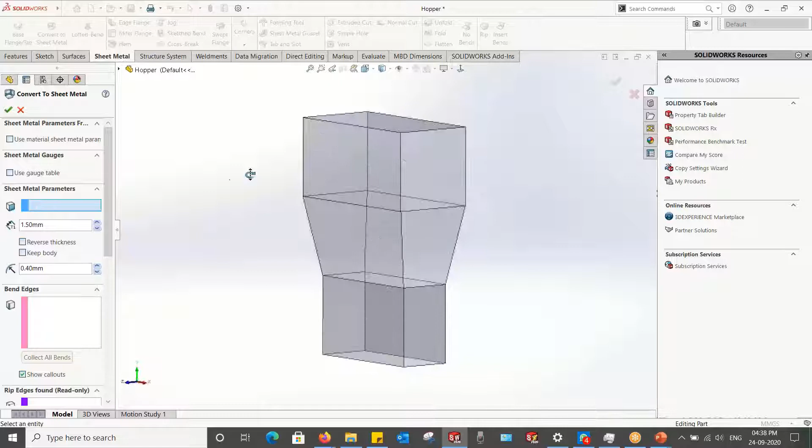So let's start with the fixed face. Okay, I have selected a fixed face. I think there is no need to change this thickness. The thickness is sufficient for a sheet metal component, and the IR is also sufficient, or we can change it to 1 as per our requirement. Now this is the time to collect some bend edges. Just select some bend edges.

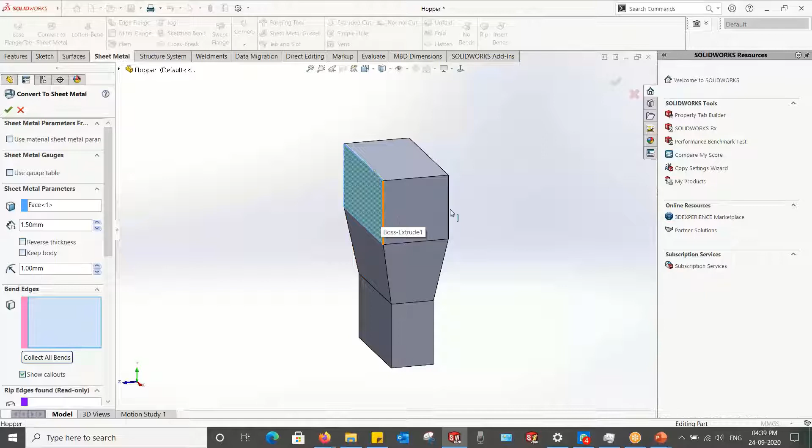One thing I want to show you: if you select bend edges one by one, the corner gap edge will automatically be identified by this command. This is the smart work done by this command.

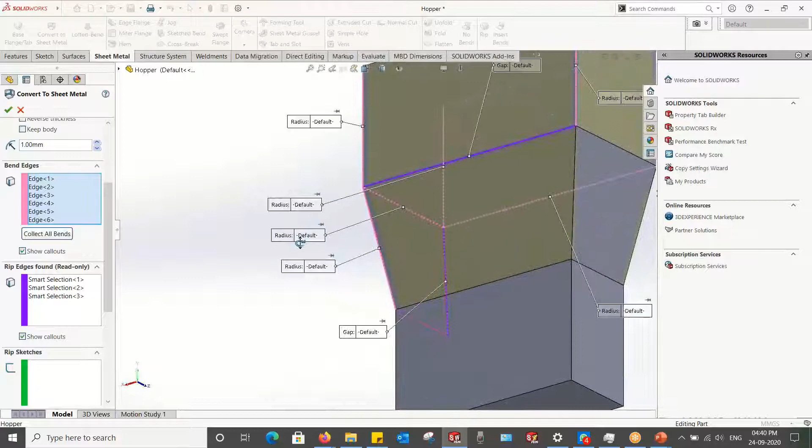Okay, so let me show you one other example. Let us continue. One bend edge, second bend edge, and the corner edge is automatically identified. Similarly here, if you select this edge as a bend edge, the corner edge is automatically identified. This is the smart working of this command.

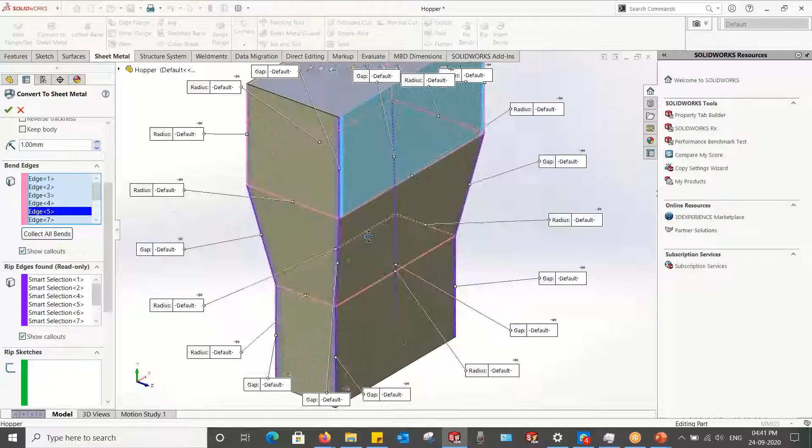Let me select it as simple as possible. Now, okay, one more thing I want to inform you regarding this command. Listen carefully. For any face, first you can see that at least one of the edges of this face has been selected as a bend edge. In case of these faces, there are more than one edges, but at least one edge is selected as a bend edge. If we leave any face without selecting any of its edges as a bend edge, the face will automatically be removed as an open side.

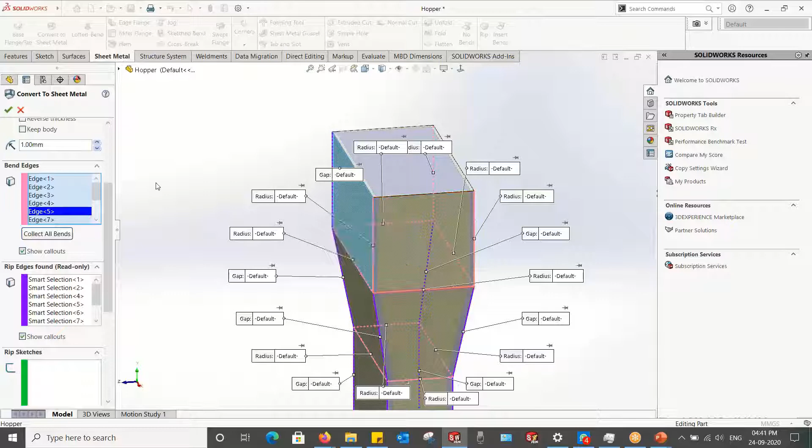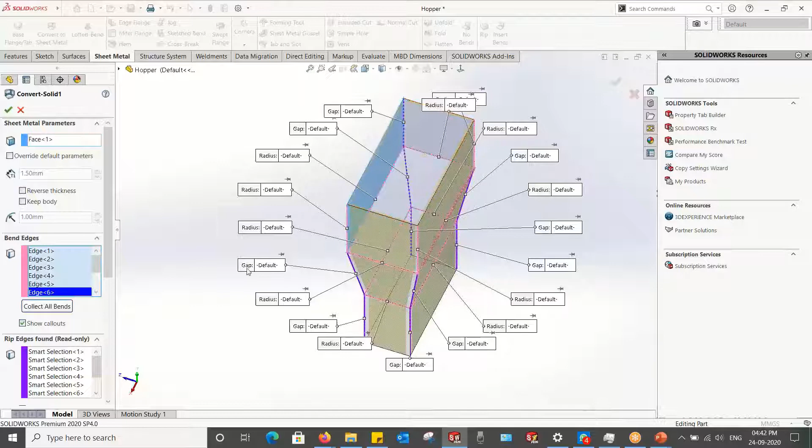Just click on OK. Now, I think all of you have seen that I have left the top and bottom faces without selecting any of their edges as a bend edge. That's why the top and bottom faces are treated as openings. Quickly return to the command and select any one of the edges of the top face as a bend edge. Now see the behavior.

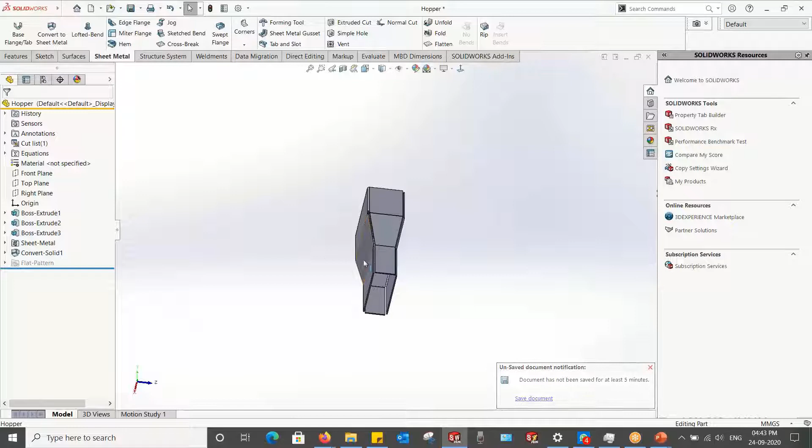Okay, this is the thing I want to show you. This is the major point. Sometimes conversion is tricky for us when we are not clear about this point, and we avoid using this command and only use it for imported bodies. Even for native CAD data, using this command is sometimes much simpler than creating a body in sheet metal. In this property manager, you can also control corner relief and corner gaps.

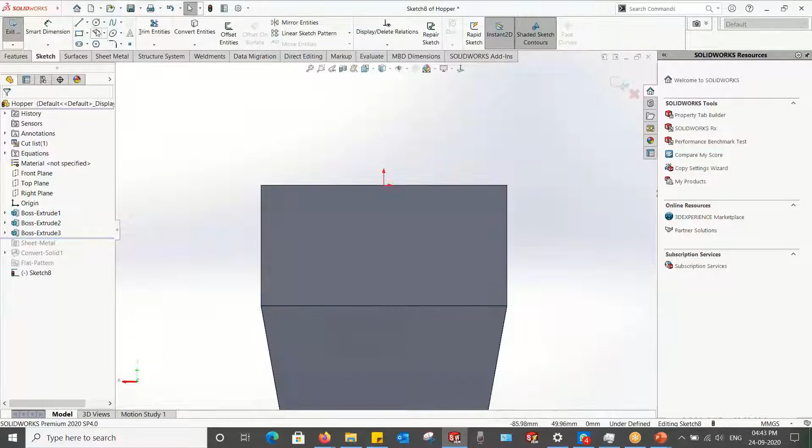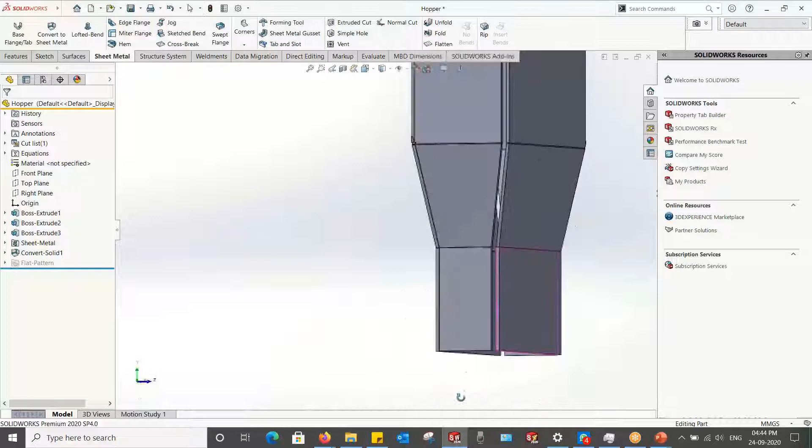Now, let me show you the rip sketch, what the rip sketch command will do for us. Say I want to create a straight gap or a straight notch on this face, 20 mm. We can select this sketch as a rip. And now you will see that the rip sketch also creates a gap, and the gap value is similar to the rest of the rips. This is the work of rip sketch. Similar work will be done by the rip command. In 2020, if you are using 2020, you can also see the preview of the command.

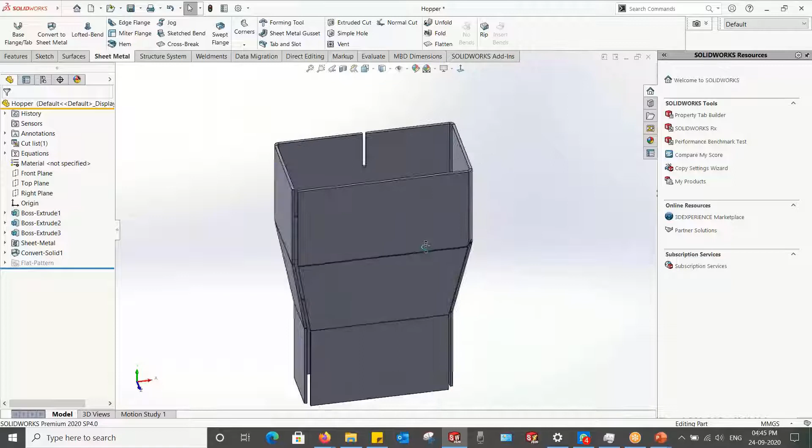Okay, so now this is the time to see the flat pattern of this hopper-like body. This is the flat pattern. Quickly export this to DXF or DWG for your cutting machine, turret machine, or laser cutting machine, whichever you use. So now this is the time to use some different commands like insert bend and rip. By using these commands, again I will convert the same solid to sheet metal. Okay, delete this.

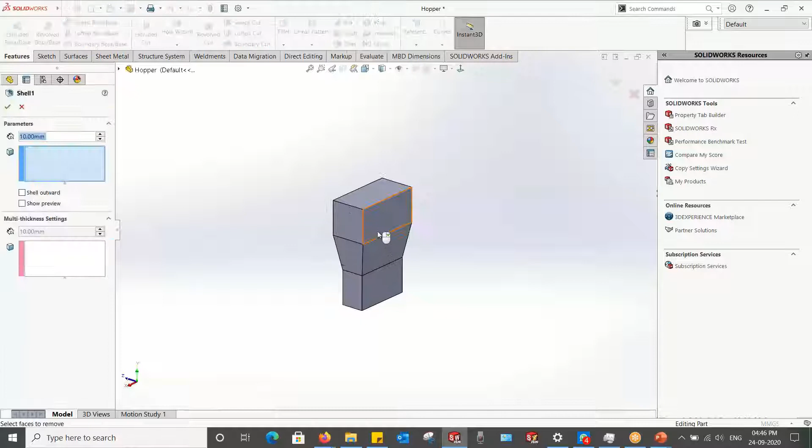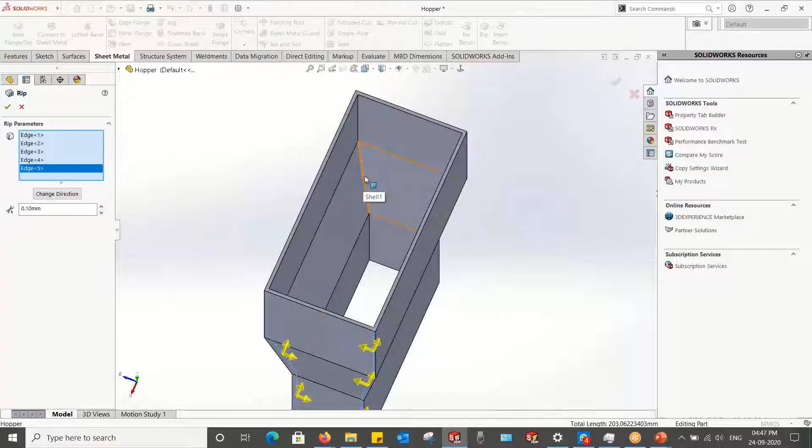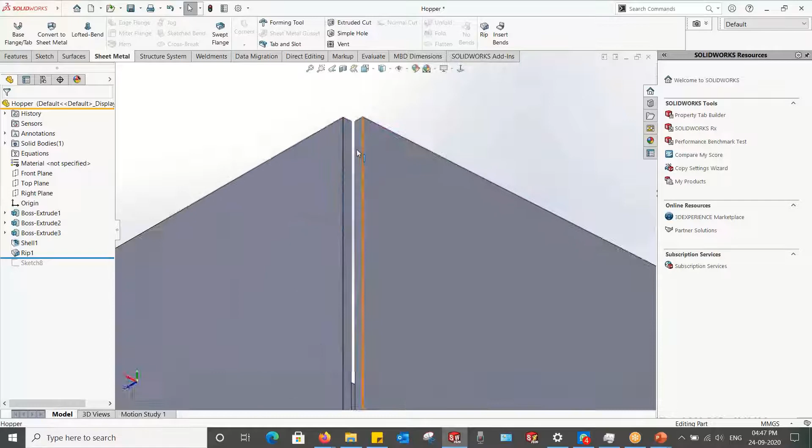Now first make this hollow, with a thickness of 1 or 1.5, whatever sheet thickness you want. The next step is to add some rips. I will create some rips as per my design requirement. Let's see if this gapping is possible or not. Yes, this is possible. From here we can control the gap value, corner gap value. So you can see corner gaps have been created.

Okay, now the insert bend command, and again select your fixed face. Inner radius, say 1 mm or 0.5, or any value you can take, and set the auto relief value. Rip parameter, if there is any sketch, decide the value of rip gap and click OK. Auto cut relief was made for one or more bends. Okay.

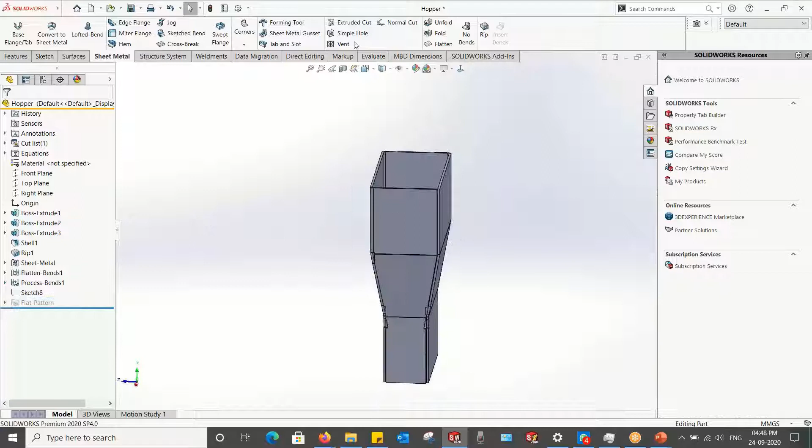Now you can see the sheet metal parameter has been added, and also the flat pattern folder has been added. So just click on flat pattern, and the flat pattern is ready to export for cutting or for drawing. So this is the conversion of native CAD data. Now I will discuss the same commands for imported data as well.

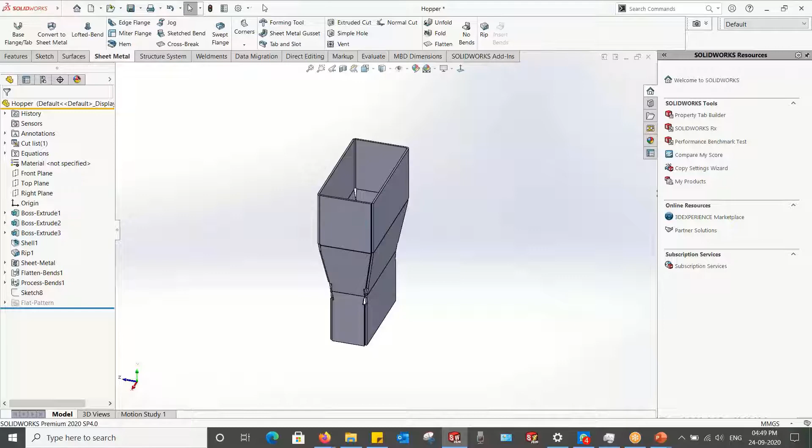Let me open an IGS file I have already created. If there are any faulty faces, as I have already told our users, faulty faces are a tricky item, and this is the time to run Import Diagnostics. We can also directly convert from imported data to sheet metal with the help of FeatureWorks in a few clicks, but I will show you this in the next slide. This time I will try to convert this imported data to sheet metal by using convert to sheet metal.

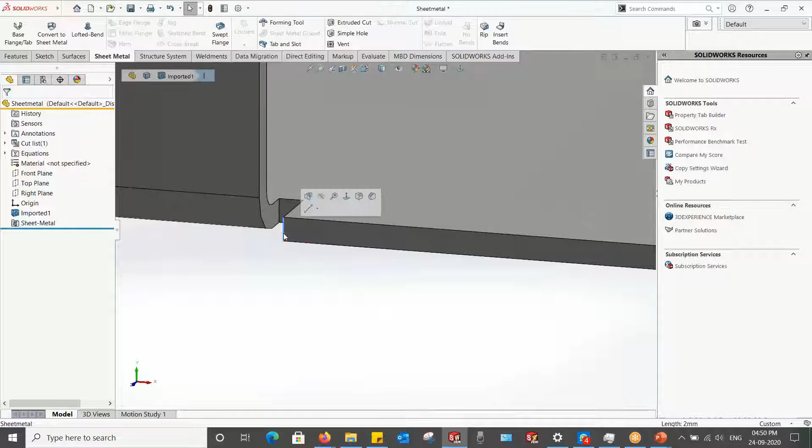Let me proceed. This is the fixed face. The first process is to check the thickness, if you want to maintain the same thickness. This is 2 mm. So just convert to sheet metal, fixed face, 2 mm. Why have I inserted a 2 mm value? Because I want to maintain the same thickness as given in this imported data. And inner radius, just check the inner radius value, 1.5 mm. 2 mm, 1.5.

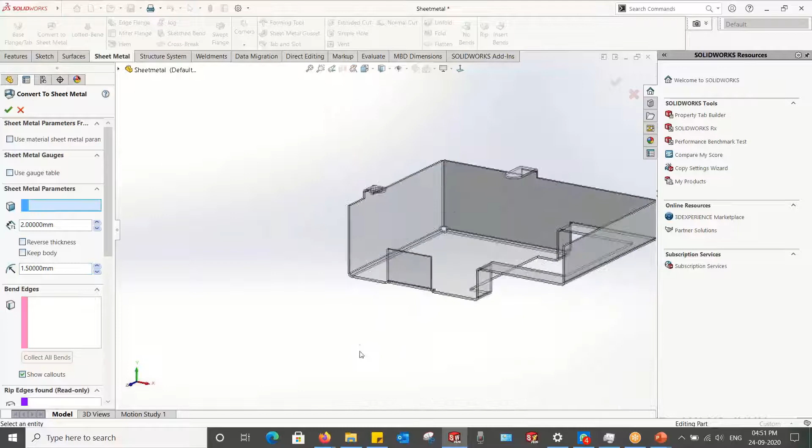Okay, now this is the time to collect all bends. Let's see what will be the result. Just click on OK, and your imported model is converted to sheet metal. Now you can generate a flat and also generate a DXF.

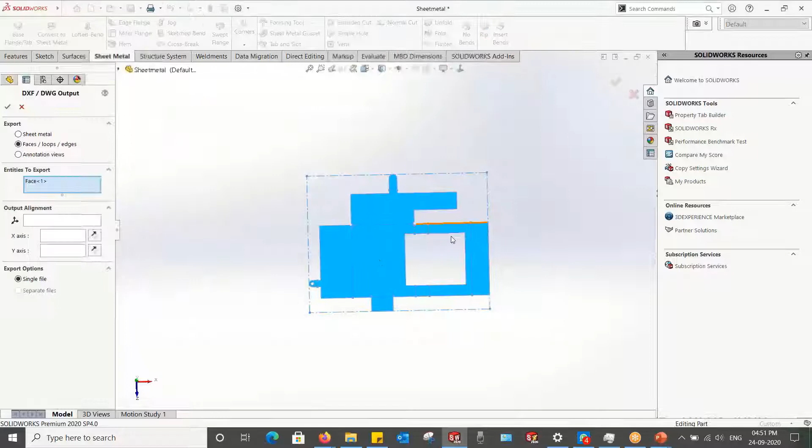So this is the DXF. Now you can use this DXF directly in your cutting machine. Okay, quickly move to our next slide. The next is FeatureWorks for sheet metal.

FeatureWorks is the add-in provided in SolidWorks 3D CAD for all modules like Standard, Professional, Premium. It also enables users to deal with imported data like IGS, STEP, Parasolid, and also native CAD data. It also helps users to convert a single imported feature into different supported SolidWorks features like extrude, revolve, cut extrude, cut revolve, or some sheet metal features.

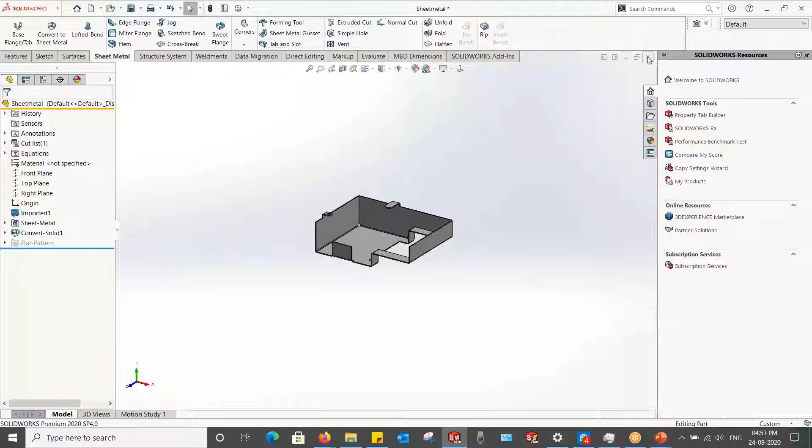Let me show you how. These are some features supported by FeatureWorks, and this is the time to show you how FeatureWorks works for sheet metal components. Quickly open the same IGS, just import and heal, and click yes for FeatureWorks. Let us see how FeatureWorks makes the process easy.

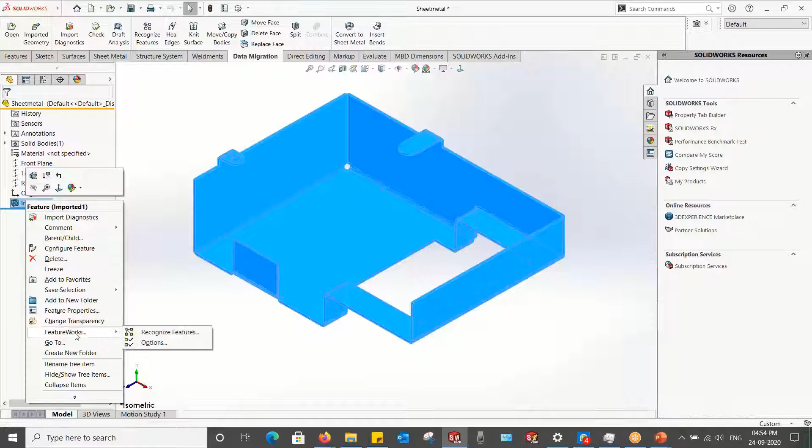First, let me show you where you can find FeatureWorks. This is Recognize Feature. Here you can run FeatureWorks, and you can also run it by right-clicking on the imported body below your origin in the history and choosing FeatureWorks or Recognize Feature. Okay, just select and click on sheet metal features.

No need to recognize extra features, as it will take more time. Just select sheet metal features and some other features if you want to recognize them. Select the base fixed face. Now, by proceeding forward, FeatureWorks starts to recognize your 3D CAD data.

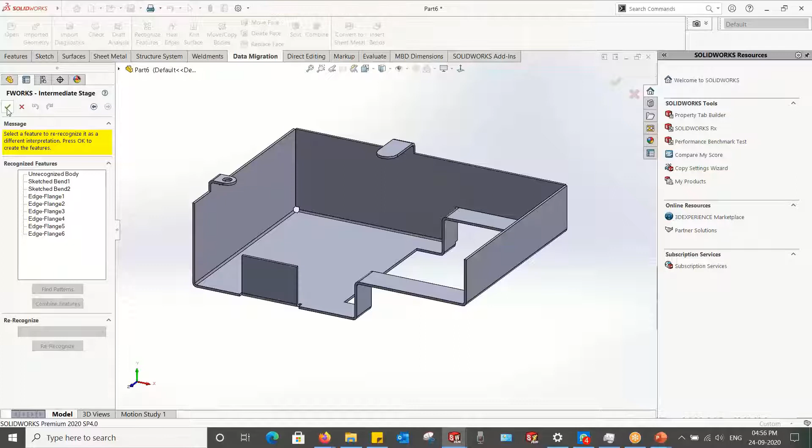One more thing I want to tell you: FeatureWorks works perfectly with bent sheet metal components. Okay, so let's see what SolidWorks has done for you. It is converting what it has recognized. SolidWorks is applying all the recognized information to the imported data and hopefully it will convert to a perfect sheet metal body with the same thickness, same gaps and other values.

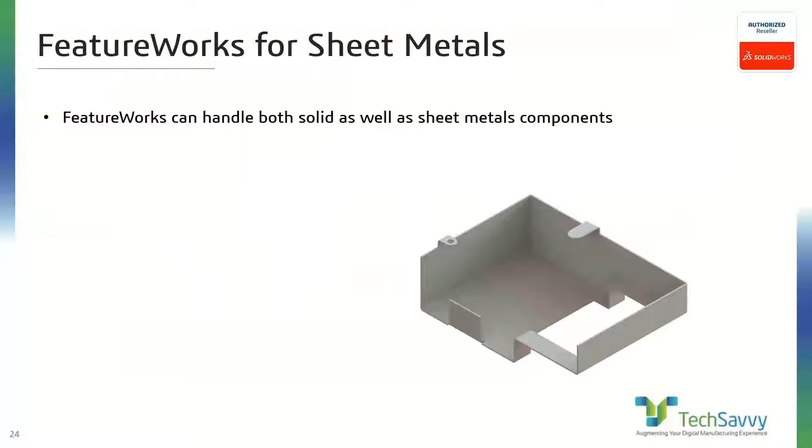The history has also been created. Check it by pressing the flat button. Now the flat is created. Pretty easy. Okay, so this is the method to create sheet metal from a solid by using the convert to sheet metal command and insert bends. We have discussed the utilization of the rip command and the meaning of rips, and how we can handle imported data with the help of FeatureWorks for sheet metal.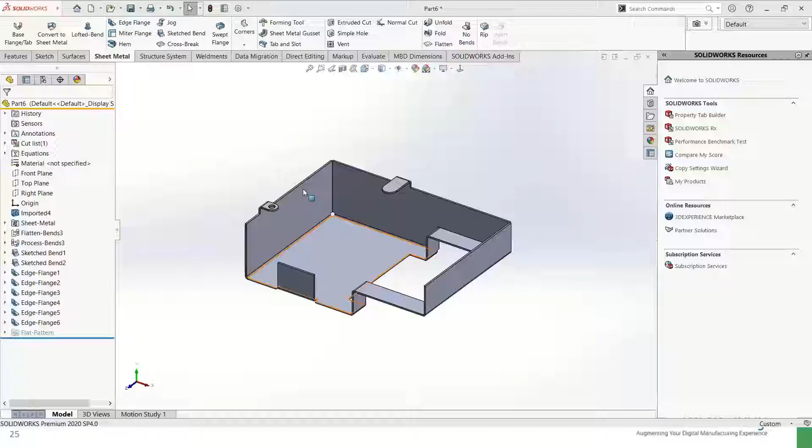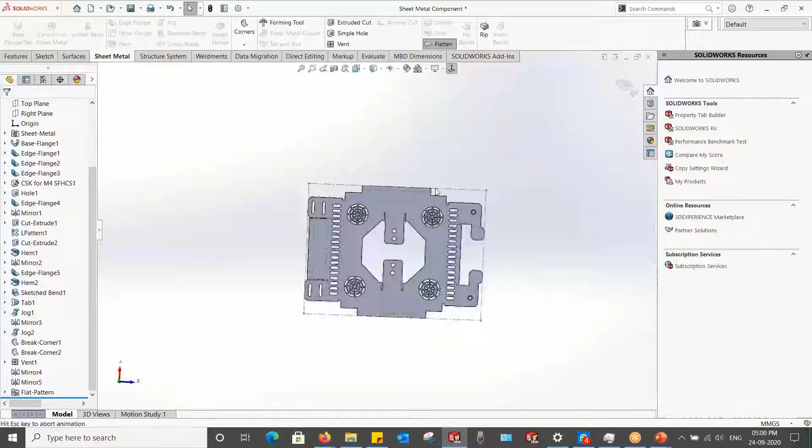Now, commands in 2D to generate tables. This is a very good topic. So let me just open. I think some of you have recognized this component. This is the component you have seen in the last exercise. Almost all the commands related to sheet metal have been used for creating this component. This is a good example for understanding how sheet metal works inside SolidWorks. This has a pretty good flattened shape.

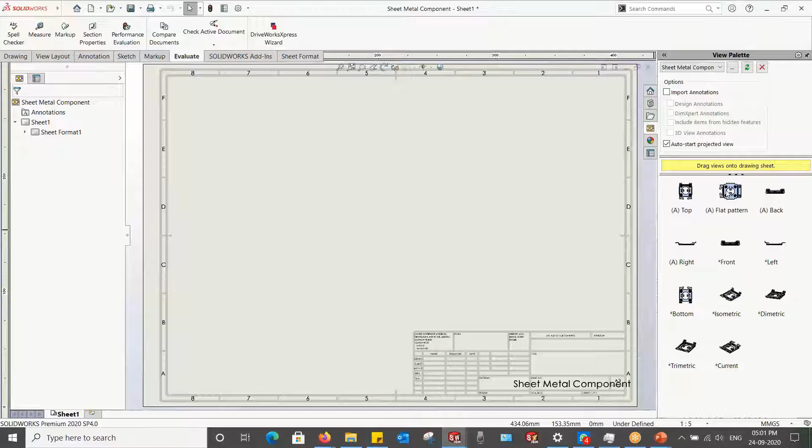Now this is the time to show you how tables work for sheet metal components. I will also discuss some problems. Some of you have complained to me that sometimes you have not found the sheet metal flat pattern inside the drawing View Palette area. Some of you have complained that you created a sheet metal component or body and the flat pattern is not found in the View Palette automatically, so you had to use different workarounds. So I will also discuss that point.

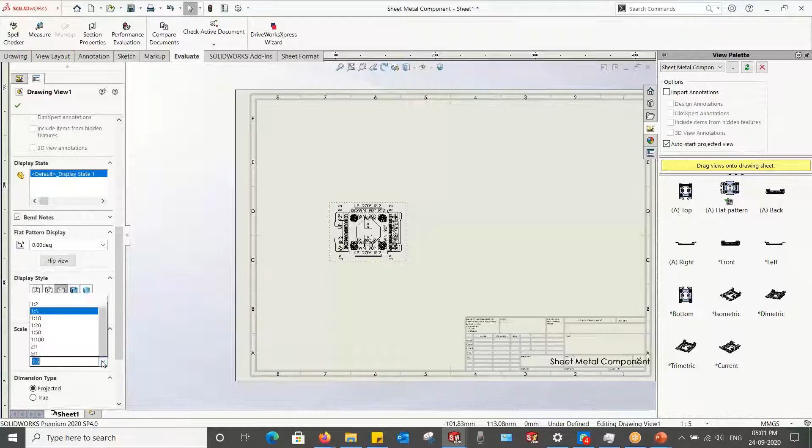Okay, now just drag and drop this flat pattern and scale this to a higher value. What will the sheet metal bend table do for us? Actually, by using the sheet metal bend table, we can create a bend list.

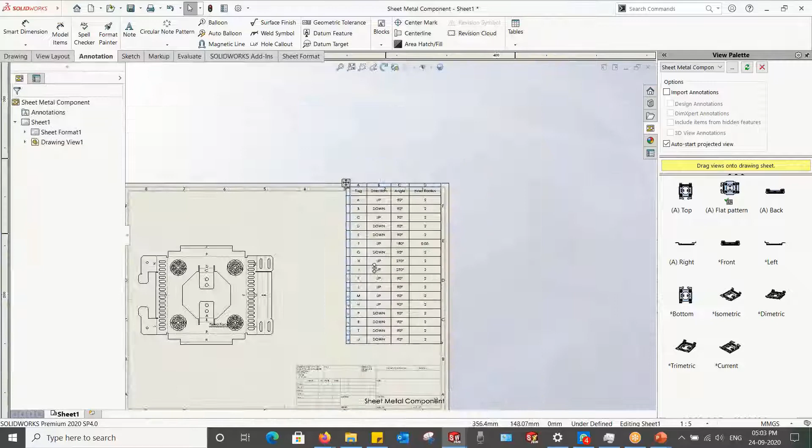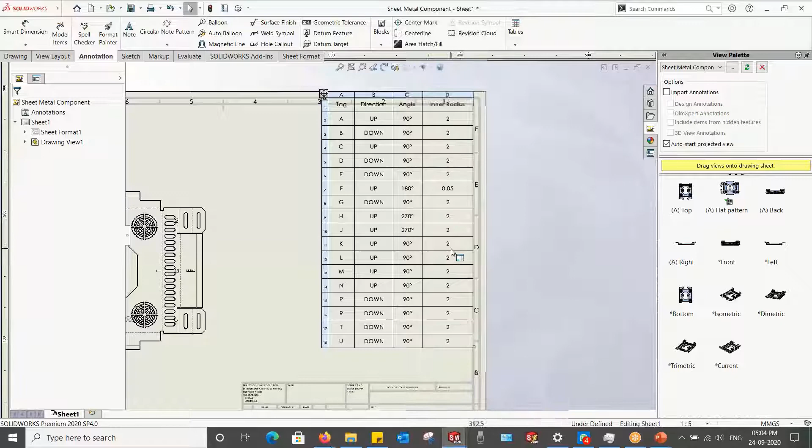Let's add a bend table. And you will see that all bend information will attach to this table from this flat. All bend information you will find here, like tags, and direction, which bend is in the up direction, which bend is in the down direction, how many degrees you have inserted in your model, and the IR. All information you will find here for this model.

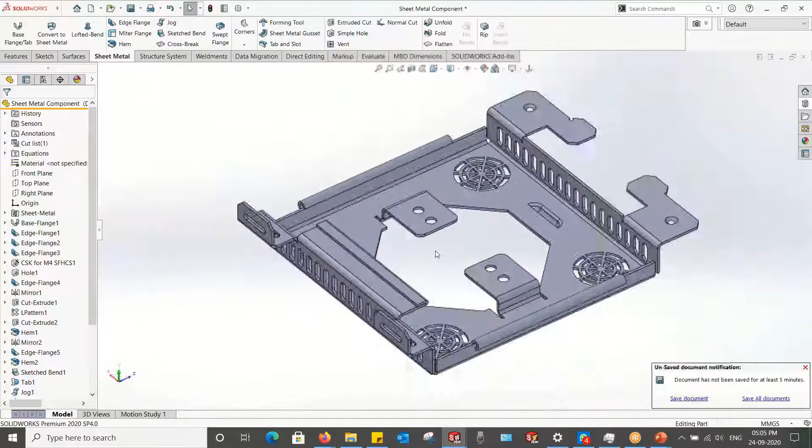Okay, now this is the time to do something extra with this model. Put some louvers on this, position them by using dimensional values, and click OK. What I actually want to show you is how the punch table works for forming tools.

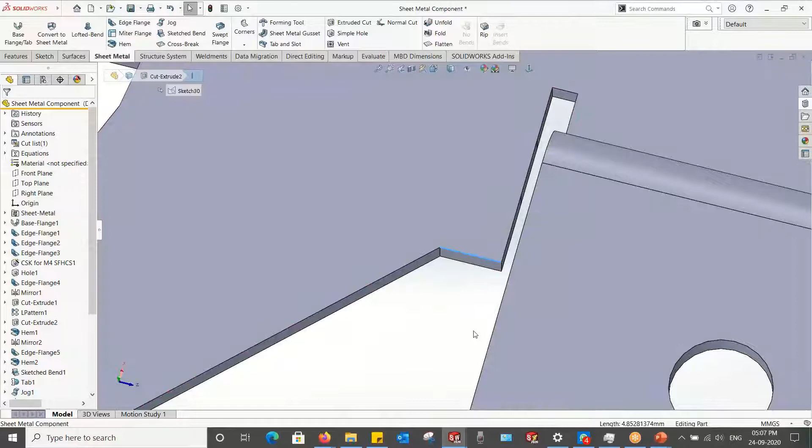You can also create your own forming tool. Let me show you how you can create your own forming tool. Let me take some dimensional idea. Okay, now quickly open a new part.

We are going to add a customized forming tool as per our requirement with the help of the forming tool command, and then we will apply that forming tool on this model also. Then we will create a punch table inside the drawing. Just start to create a forming tool. I am going to create a very easy forming tool, not a typical one.

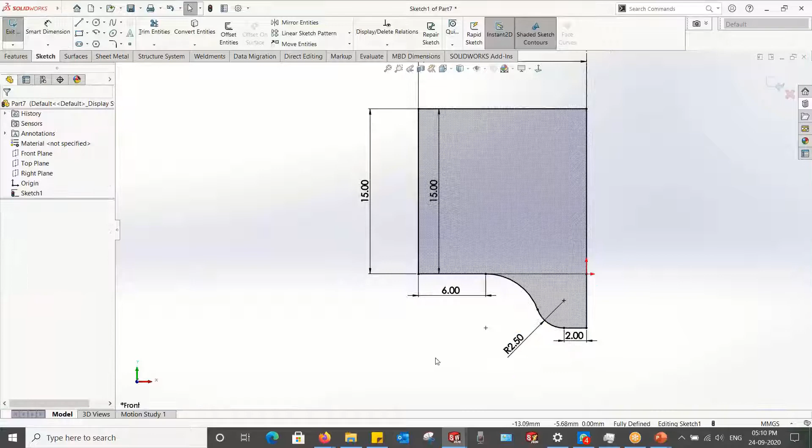First make it horizontal, then provide some dimensional value, then provide some dimension value here as well. Okay, now this is the time to revolve this model. And save this. First you have to save your model, like training forming tool.

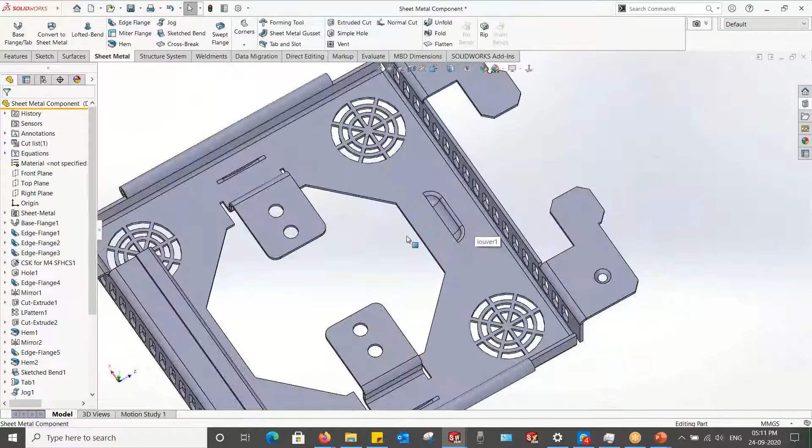Okay, now I'm going to explain what the forming tool command will do for you. The forming tool command will never apply a forming tool on your sheet metal body. Sometimes users are confused that the forming tool command will help them create some forming punches like this on their sheet metal model, but the forming tool command is only to help you create a forming tool.

Just apply some parameters like stopping face, and faces to remove like this. If you create a model without selecting faces to remove, then it will simply create an emboss. If you select a face to remove, then it will create an emboss with hole. Okay, I will show you both items. Let me save as forming tool. Hole, without hole.

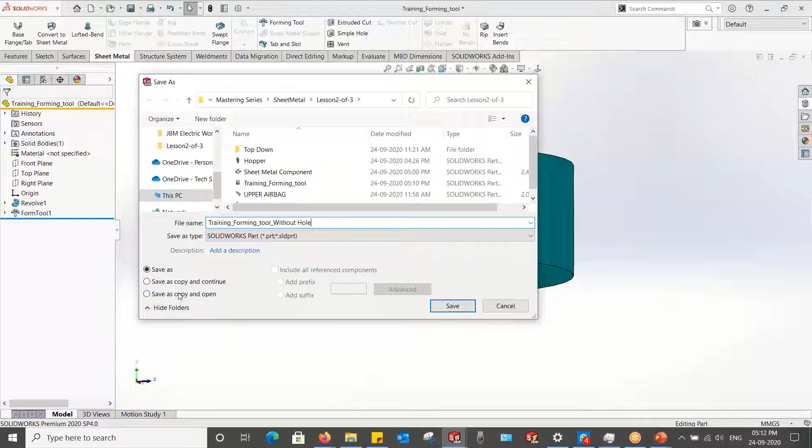Now this is the time to remove your face. If you want to put an insertion point, you can also put an insertion point by using a point sketch. Already created. This is the tool without any hole. Sorry, and this is the tool with hole. Now this is the time to add both tools in our library.

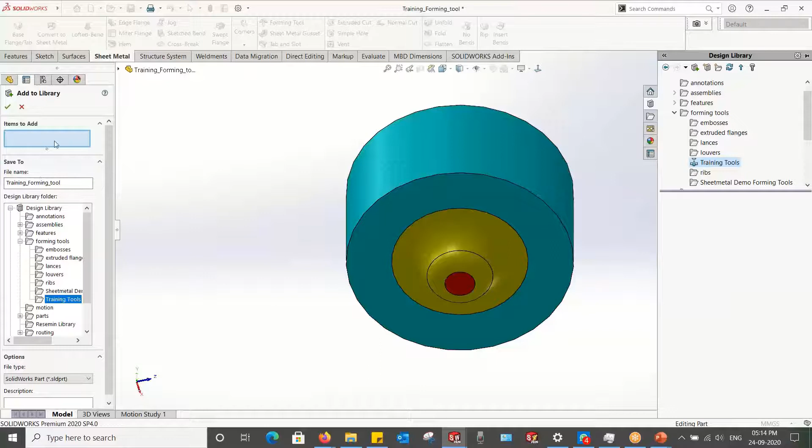You can create a new folder like forming tool, new folder, and the new folder will be training tools. Okay, actually I have to show you all the processes, so that's why I have created a folder to show you how you can use this method. Now go inside the training tools and item to add. You can select this item from here as well and name it training tool 1, or with hole.

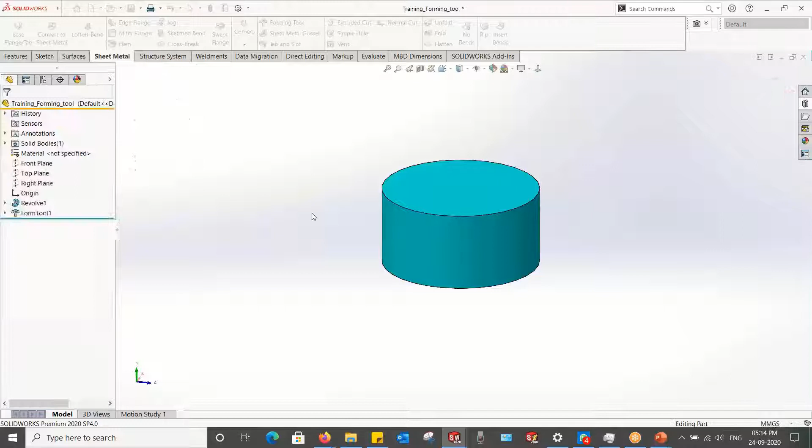It recognizes that this is a simple part, SLDPRT, and you can also put the description if you want. Just add it in your library and close it. Now this is the time to add the second item to the library. Same folder I have selected, body I have selected, and a description if you want to put any. Close this also and save.

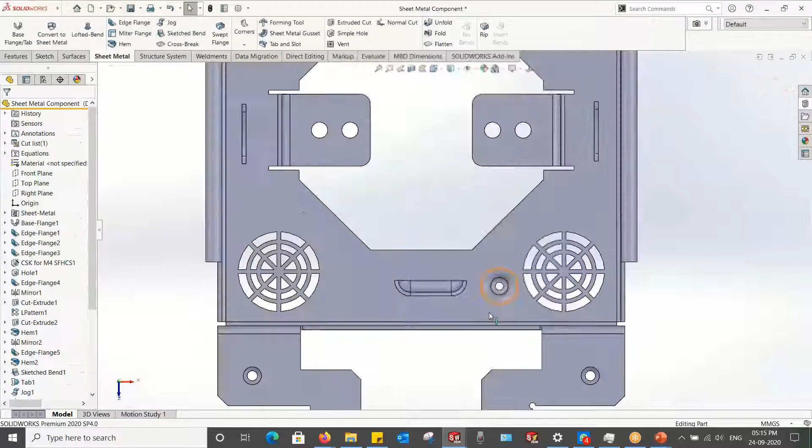Now I am going to apply these two one by one on my model. Just apply this here. Okay, let's see which forming tool I have applied, with hole or without hole. It is with hole, and the next one is without hole. So this is a very simple process to create a forming tool as per your requirement. Make sure, in case of flat pattern, the forming tool will never flatten on your flat pattern. You can see even here also.

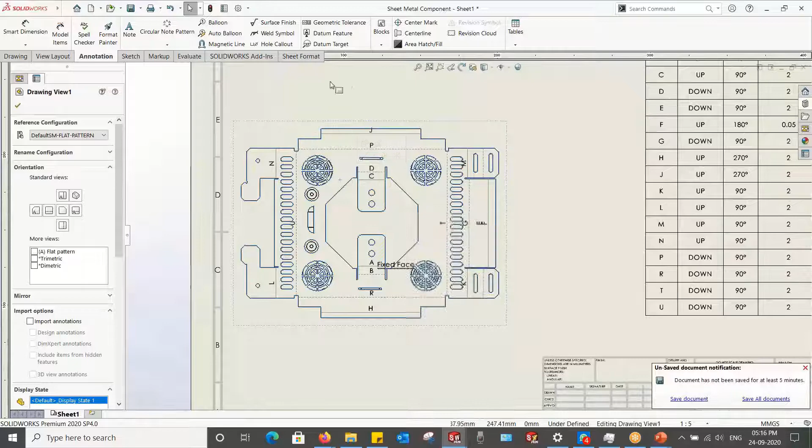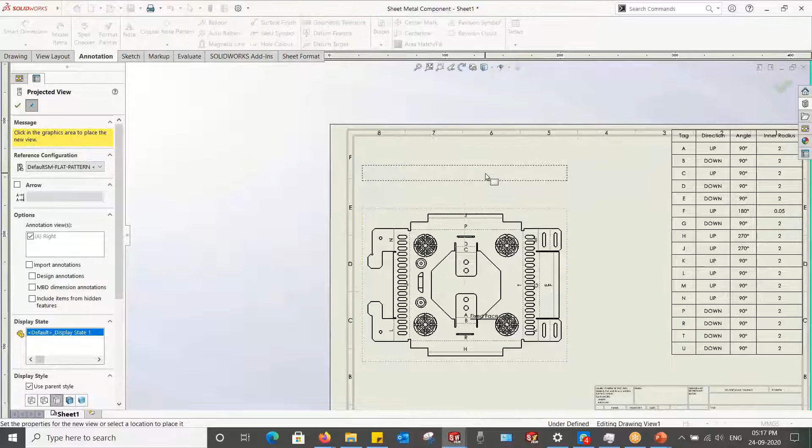Drawing is updating. Okay. Now this is the time to count the forming tools. Punch table. You can see in this flat pattern, the forming tool shape is not flattened. The forming tool is as it is. Let me show you the top view of this. The forming tool's shape is as it is, no change in the forming tool shape. Okay, hope everyone is understanding what I want to say.

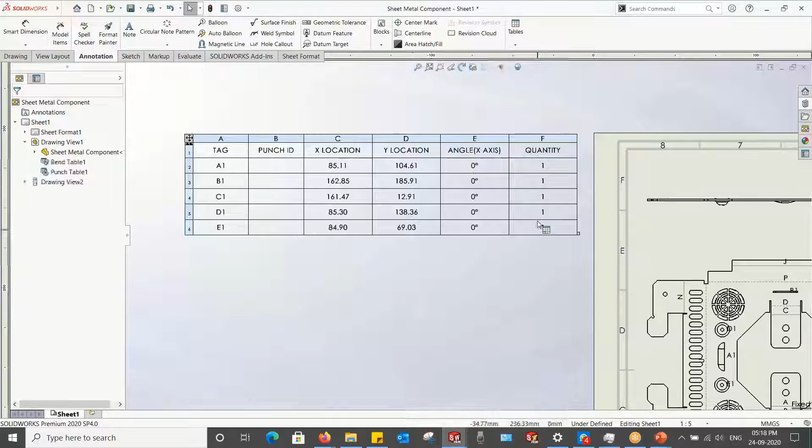Now this is the punch table. Just put the XY value. This is my X. This is my Y. And now this is the time to generate a punch table. A1, B1, C1, D1, E1 along with locations. As we have not made any description, you can make a description for punch ID as well, or you can put your punch ID in your property manager. This is the quantity if you have more than one punch, with location.

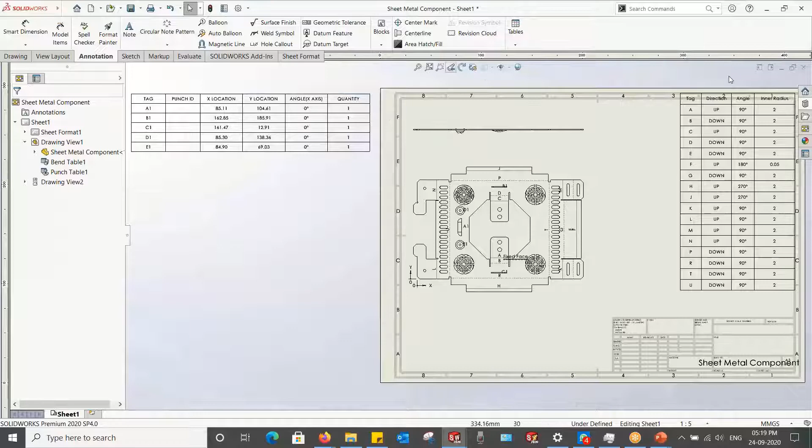Now quickly move to our slide. Sorry. Okay, I think we have sufficient time to discuss some top-down assembly. Before discussing top-down assembly, let me show you a limitation also. As I have already discussed, some problems have been faced by our users in sheet metal, that they did not find the flat pattern inside the drawing. Let me open a sheet metal model.

There are many sheet metal models available, but okay, let me see. This is the model. You can see this is also a sheet metal model with 4 bodies. Now this is the time to create a drawing from this sheet metal model. Now you can see we are unable to find the flat pattern here. If you want to create a flat pattern, this is a multi-body component. How will the drawing recognize for which body you want to drop a flat pattern?

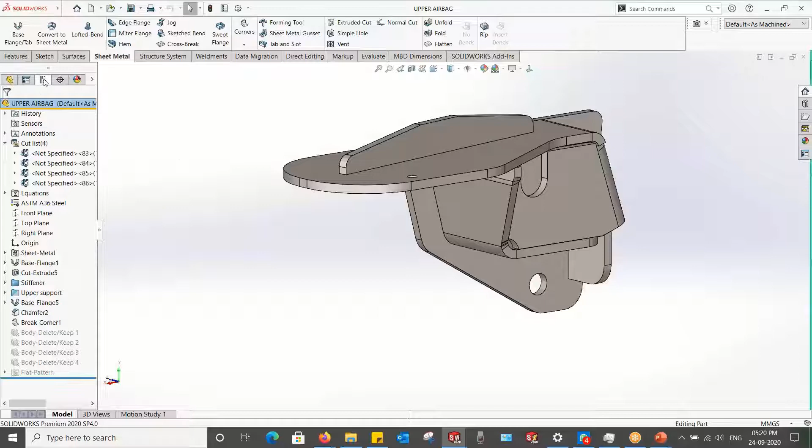Is there any way? No. For this, just create some configurations with a single body. Just suppress other commands, or I have used the delete body command by clicking on the body, delete body, and delete the extra bodies, and create this configuration. Now move to our drawing and update this.

Now you will find flat pattern. Pretty much easy workflow. Now you will find flat pattern for each and every body. You just create configuration with single body.

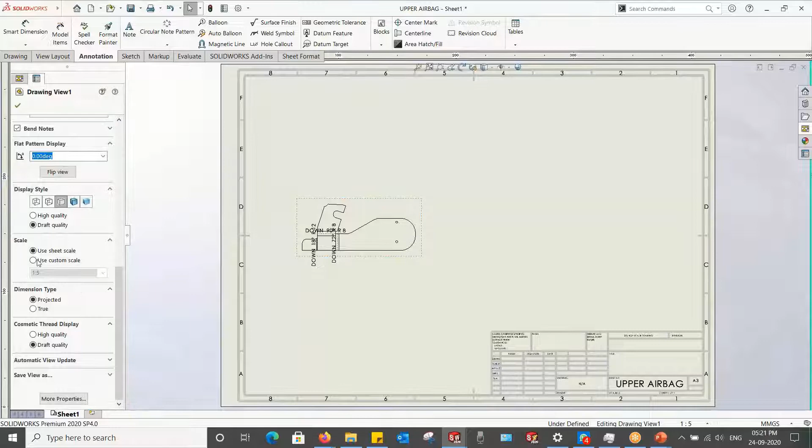The scale is too much large for this drawing sheet. And now just create a bend table, or punch table if you have used any.

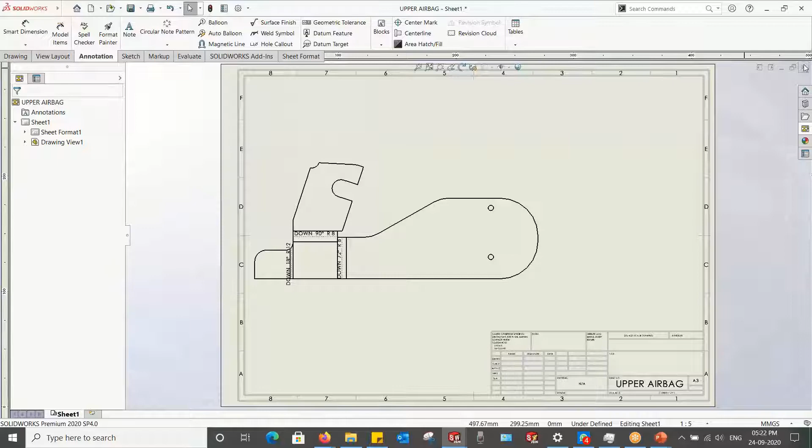This is the problem many times I have heard from our users, that we have not got flat pattern in our task pane when we create a drawing from a sheet metal. So this is the main cause: if I have created a sheet metal body in a single part rather than assembly, which is not a wrong approach. Actually this is the right approach.

But extracting a flat pattern without creating a configuration, some users also generate a configuration with flat pattern command enabled. This is not the right way. Just create a configuration with a single body and you will be able to generate flat pattern easily with all required information. Okay, so this is the point.

Now quickly move to top down assembly. Let me explain what is top down assembly inside the CAD. I think all of you have done basic CAD training with us, and in basic CAD training we always explain the types of assemblies. There are two approaches: bottom up, in which we create components and then assemble one by one in the assembly window.

The top down approach, in which we create some components and assemble in bottom up approach, and create some components with respect to the reference of the existing components inside the assembly window. This approach is called top down. Just like...

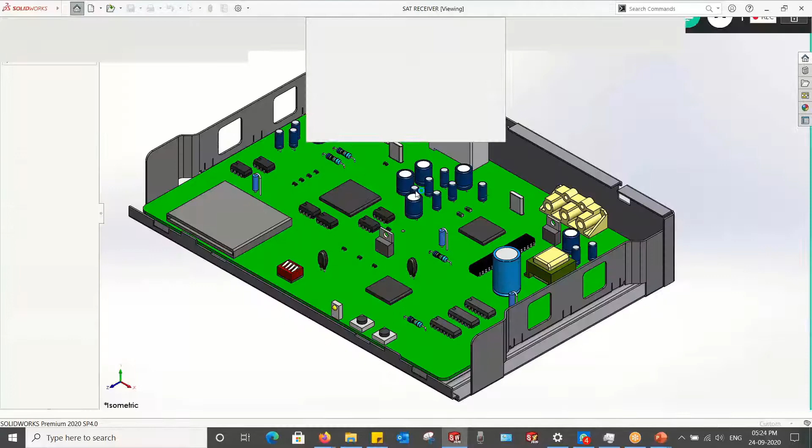If there is any, let me go inside my browser. I think there is no assembly. Okay, top down, I have one. Some components I have created and assembled here by using mates, and now I need to create an enclosure for this receiver.

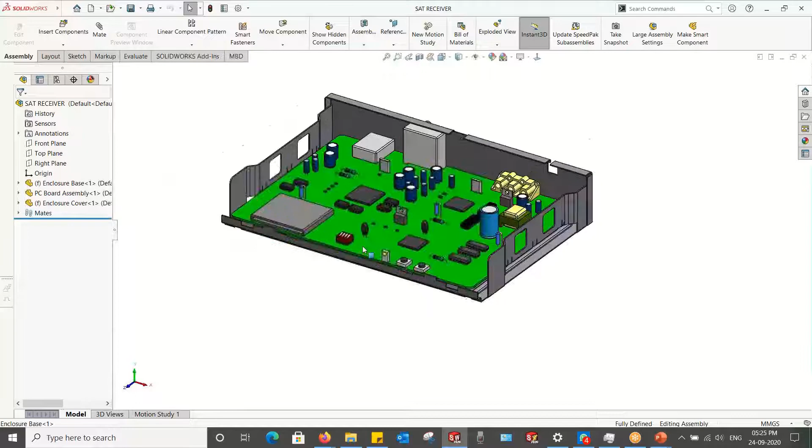So I have added a blank part, just by using the new part command in my history, and I am going to edit this and start part creation.

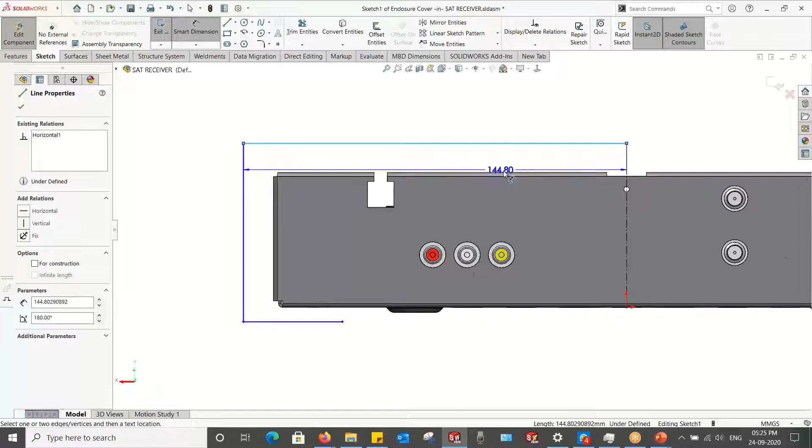Now you can see I am making dimensional reference with the existing part like this. This is the top down approach. 1 mm gap I required in this side, same gap I will provide.

Now this is the time to create a flange with the help of this sketch. Create a base flange. All of you can see that I am still working inside the assembly window, but by editing the part, modeling options are available.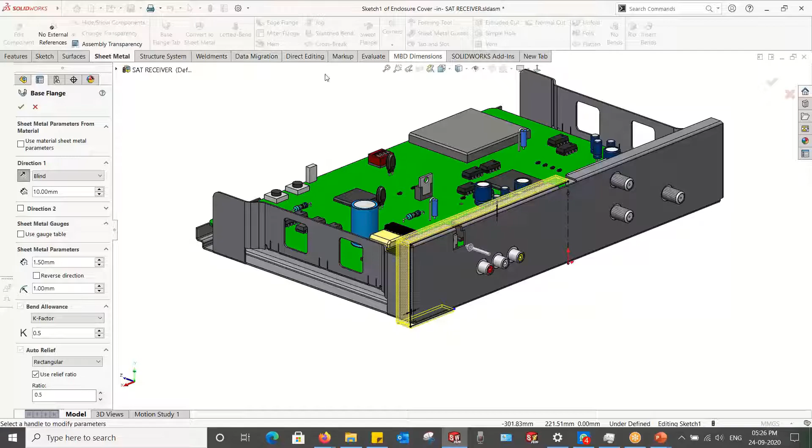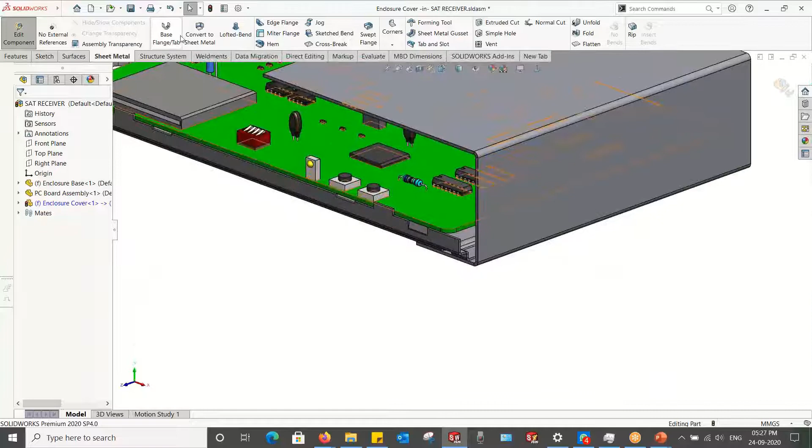Base flange has been created. Now this is the time to create some different vents.

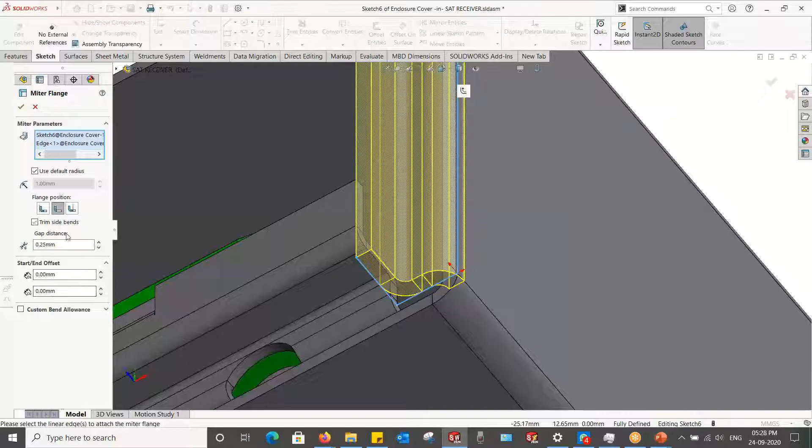I can use the existing model references for this also, and create a miter flange. First, outside the material, to avoid the interference, and trim the side bends for these types of interference.

And select another edge. Provide corner gaps as per your requirement.

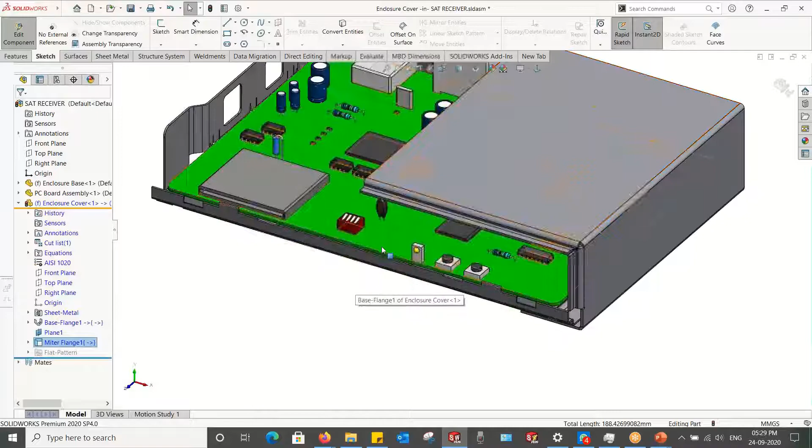Okay, no issue, these all values we can calculate, so not spending much time on this. Just create a sheet metal flange. Then this is the time to add some edge flange. Let's use value 20 mm.

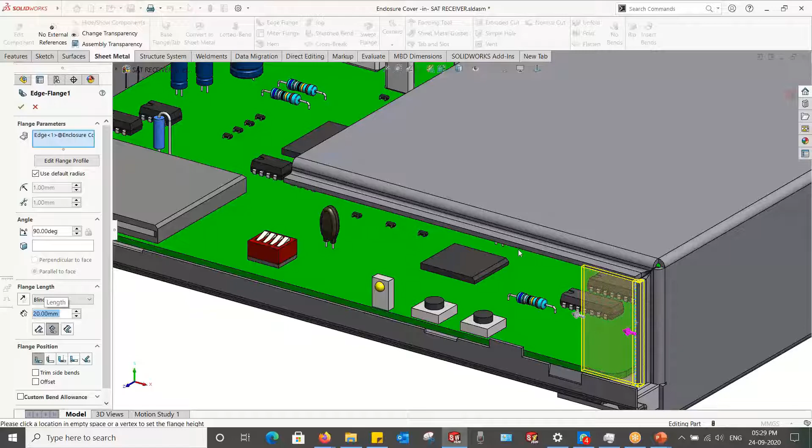Okay, now just mirror this sheet metal body to another side. Okay, now your housing is almost created.

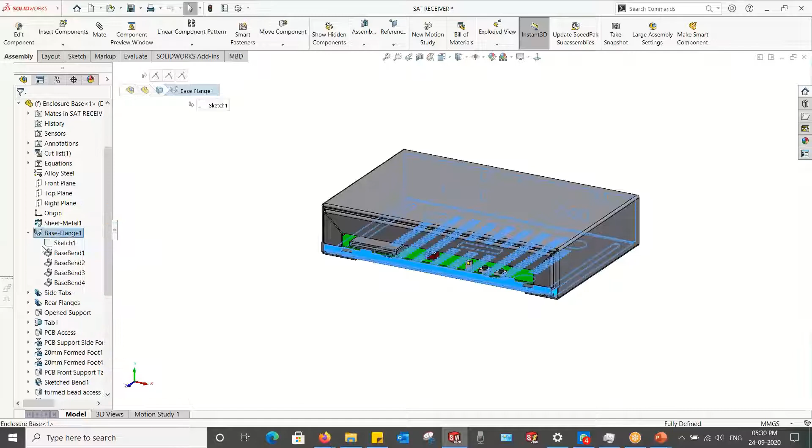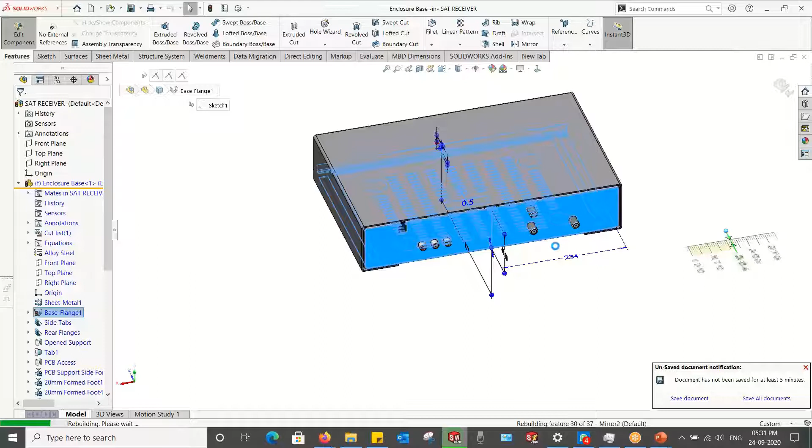What is the benefit of the top-down assembly approach? Basically, for sheet metal models like this. Just increase the size of this. Your housing or your cover will automatically update. This is the main benefit of the top-down approach.

Okay, let me show you the finished model. I have already created a finished model for you. Sorry, just stop the preview window. This is the main benefit of top-down approach.

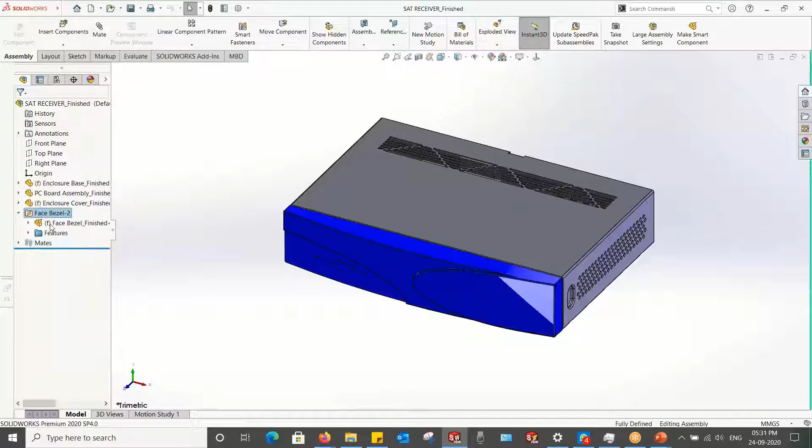Let's hide this item, and this is the finished item. Let me show you the cover only. So you can see we have applied different commands on this.

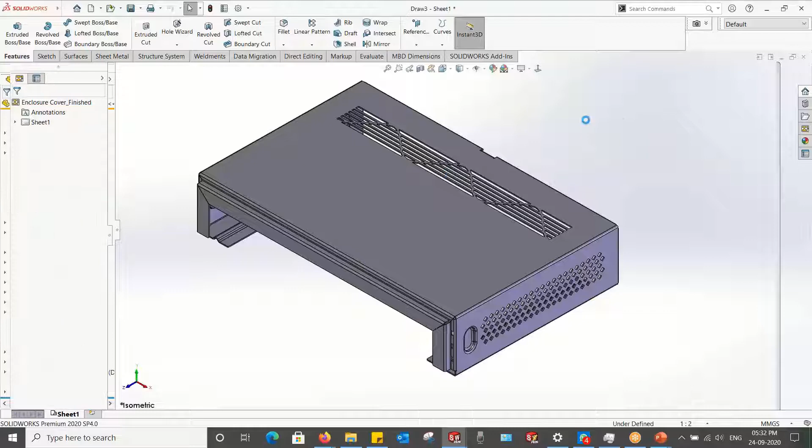Just create a beautiful drawing. Just try to create a beautiful drawing with this model, flat pattern.

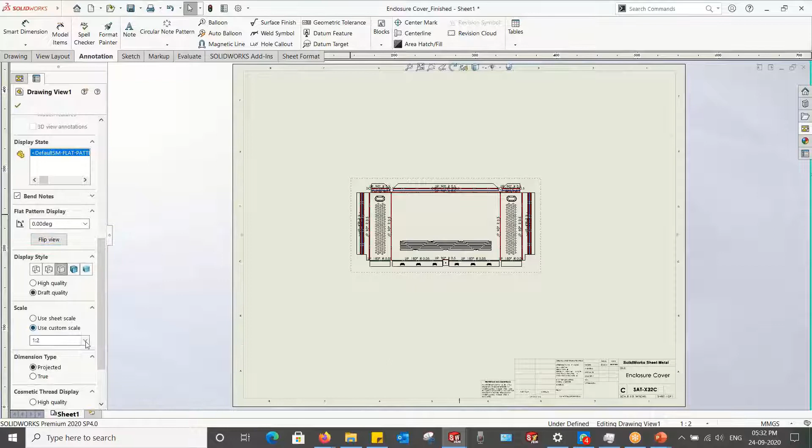So what you will find regarding this flat pattern, you will find this is the same. This is the same flatten I have added here. So this is the top-down approach inside the sheet metal.